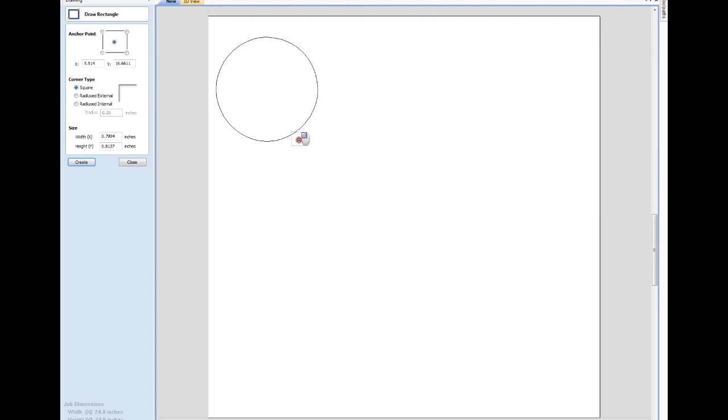If I wanted to create the design here, I could just click on Create a New File, specify the size of the material I want and the thickness, and then hit OK. And then use these simple drawing tools to create whatever shape I want. I could specify the location and size of this object. I can create different shape objects.

I can combine multiple objects by selecting them and using this Combine tool, and now they become one object. I also have this polygon type object to create whatever shape I want. And then I could specify how I want the Creation Station to cut those shapes.

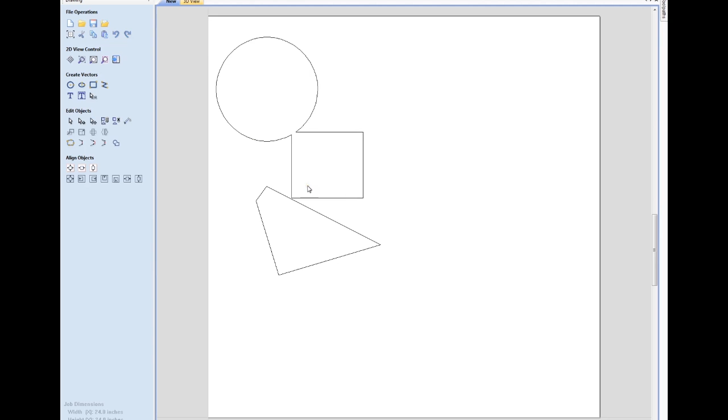But to save time for our purpose in this demonstration, I'm going to open up the design that I created in a simple drawing program. In this case, I created this design in Adobe Illustrator, but there's also a free open source software called Inkscape that allows you to do essentially the same thing.

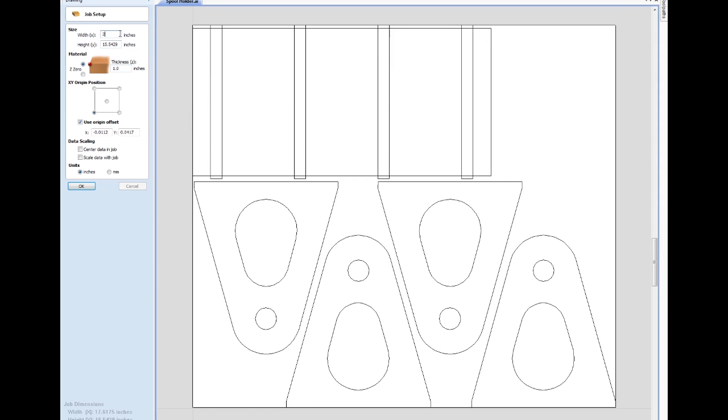So once you open the design, it automatically creates a workspace for you. I'm going to make the workspace just a little bit bigger to make it a little easier for us here, and tell it the thickness of the material I'm going to be using is 1/2 inch.

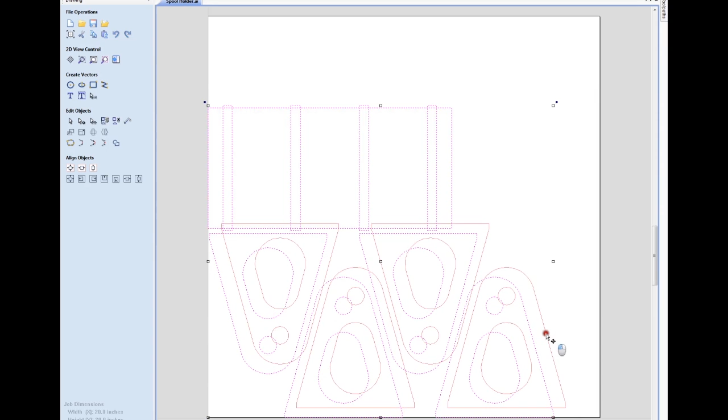So once I do that, there's my design, and I'm going to select all of these objects and just move them away from the edge a little bit here, just to make it a little easier for us to see the tool paths when I create them. But normally you would just leave them right up against the edge.

So the first thing I'm going to do is select the first things that I want to cut out. So I'm going to cut out these circles here for the piece of dowel rod that are going to hold the spindles in place. So I'm going to open up the Toolpaths tab and hit this little tack here, otherwise it'll keep automatically hiding this Toolpath tab. And I'm going to click this Create Profile Toolpath.

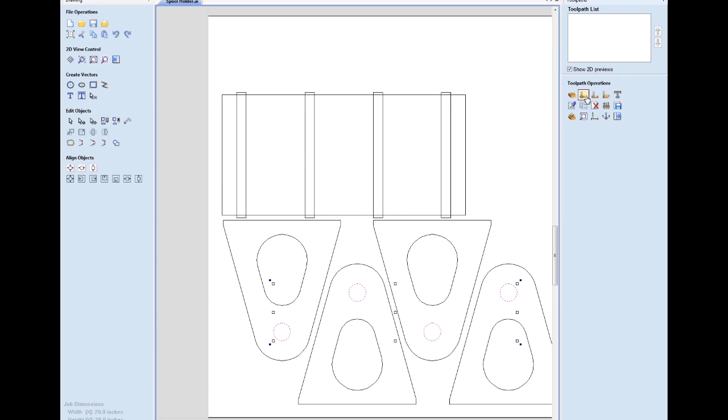And a profile toolpath follows the line of the shape. So you can specify either along the outside of the shape, along the inside of the shape, which is what we want in this case here, or directly along the path itself, right in the middle. So we want to go inside. We want to tell it our depth is going to be 1/2 inch. It's going to start cutting at 0 inches from the surface, or right at the surface.

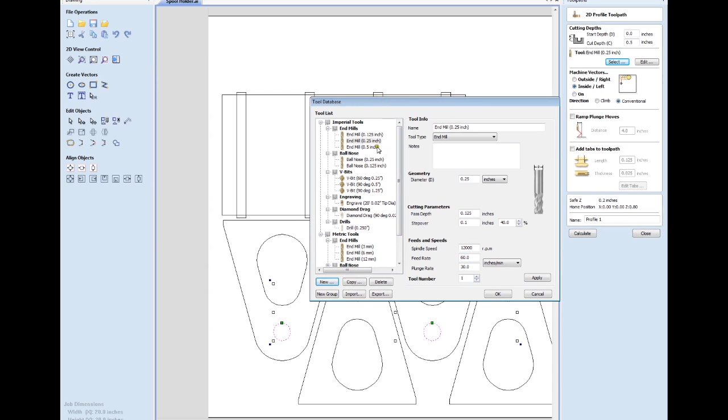And we can select the tool that we want to use right over here. So you have all these different options. I'm going to use the 1/4 inch end mill for all of our cuts in this project, and then hit calculate. And you'll see that the software automatically calculated how the tool path is going to move, what it's going to do, how it's going to cut out these shapes, and it previews that for you.

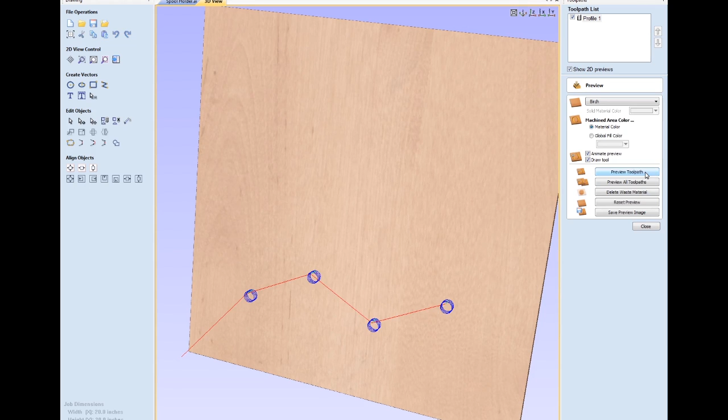If you hit the Preview button, it'll actually show you what it'll look like when that shape is actually cut out of the material. So you'll see you have this little tiny leftover tab, which is very small, and once it cuts through, the router bit will probably kick it out of the hole. But it's too small to worry about.

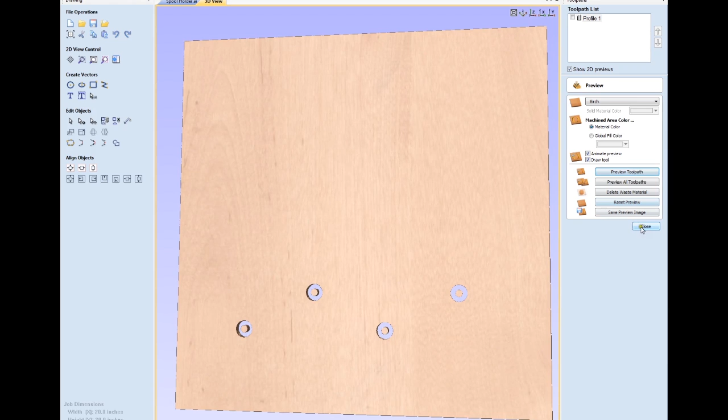The next shape, however, these larger pieces, we will have to worry about that piece coming out, and I'll show you that in a minute. But first, we need to cut that shape out. So again, we want to go along the inside. We want it to be 1/2 inch thick, and then we want to set these tabs. What these tabs do is they will hold the piece in place when the cutting is done.

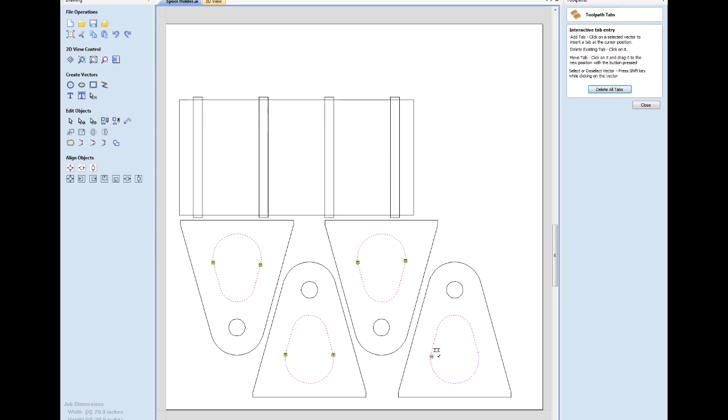So I'm going to hit Edit Tabs, and then this will allow me to insert the tabs where I want them. And once I get them all in there, we can see the preview, and it'll show us what these tabs actually will look like when the material is cut. So I'm going to hit Calculate. These are the cut paths that'll happen.

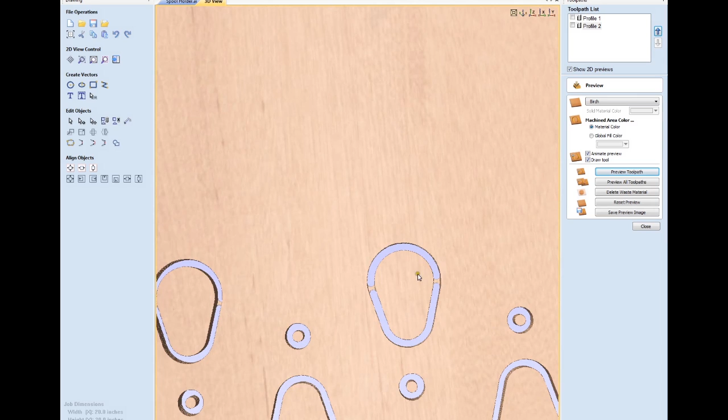If I hit Preview, it'll show us what it'll actually look like, and you can see the tabs there, which will hold the material in this piece in place so that it won't go flying across the room and potentially break something or hurt someone. Okay, so that's that piece.

Now we want to cut the actual trusses out themselves. So we're going to select those and hit Create Profile Toolpath again. This time we're going to want to go along the outside of the shape, not along the inside. And we're going to again keep the same tool and depth, and we're going to add tabs again to keep the thing from flying.

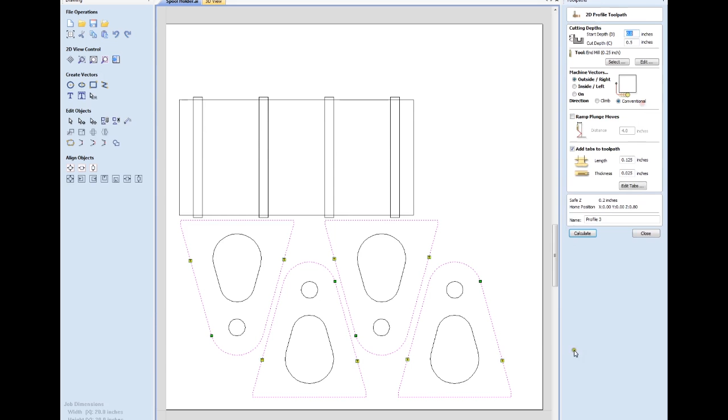And just right about here, 2 per shape, and calculate. And now we can preview that and see what it'll actually look like. And there you go. Those are the trusses. And once these are cut out, you could just use a razor blade and slice those off very easily. Maybe you give them a little sanding to smooth them out, and you will never know they were there.

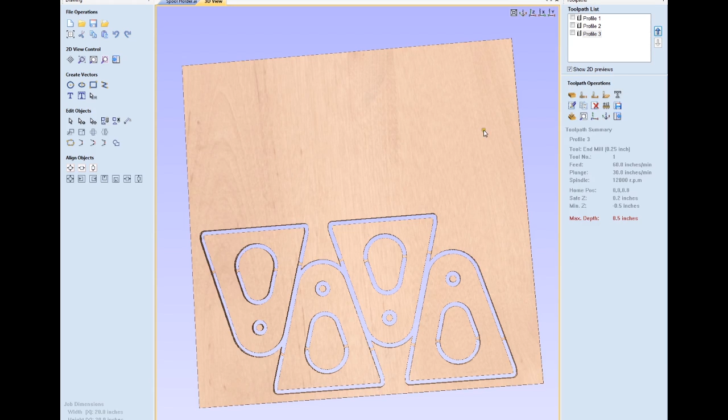Okay, so now we need to do the base. The base consists of one large piece with slots cut into it. Not all the way through. We will only want them deep enough for these trusses to slide into.

You'll notice that I made these rectangles a little wider than the base itself. The reason for that is if it stopped right at the edge here, the router bit has a radius, and you wouldn't get a nice smooth square here, and you'd have to cut that out with a razor blade, which is kind of a pain. So if you make the rectangles a little bit larger, the router bit comes out, and you'll get a nice smooth corner here.

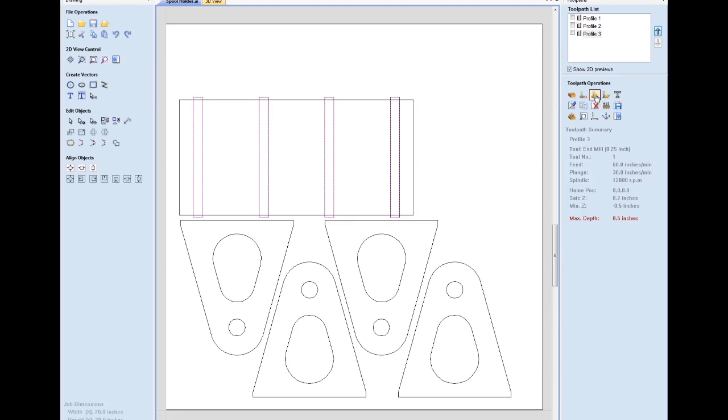So I'm going to select all 4 of these rectangles, and then I'm going to click Create Pocket Toolpath, not a profile, but a pocket. And we are going to specify a depth. I'm going to make it 0.2 inches, and a 1/4 inch tool again, same tool. And there's no need for tabs because we're not going all the way through the material. And we're going to hit Calculate and Preview, and we'll see what that actually looks like when it runs through.

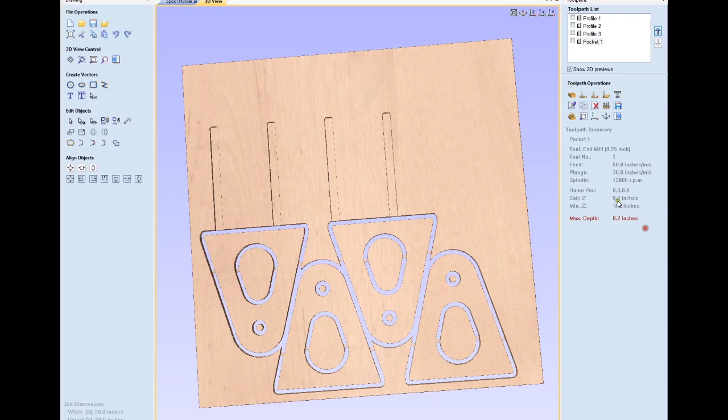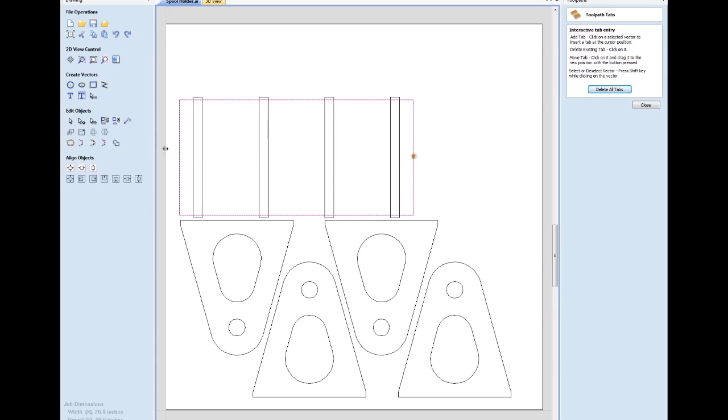Okay, we're trying to keep the pieces all nice and close together so we waste as little material as possible. So the last step is to cut the actual base out itself. So we're going to go to, again, a profile toolpath, cut along the outside all the way through, so 1/2 inch thick, and we're going to add a couple tabs again just to make sure this piece doesn't go flying once it gets loose. Okay, and calculate and preview, and that's what our final object is going to look like once we're done cutting it out.

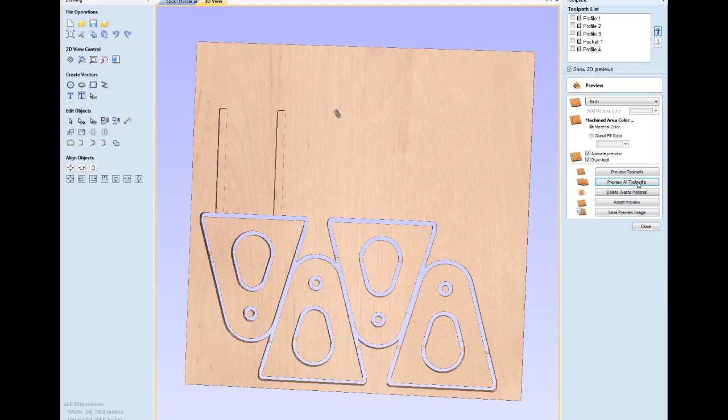So if we want to see the whole thing, we can hit Reset Preview and preview all toolpaths, and it'll run through the entire program to show you what the Creation Station will actually do for this project. So now that we're done with that, the last step is to actually save our toolpaths. So we're going to hit Save. We're going to select the toolpaths that we want to export, which in this case is all of them. We're going to select a post processor.

We're going to want the G-code arcs in inches post processor, and you'll notice there's a bunch of different post processors for different machines. Our machine, the Creation Station, just uses standard G-code, so there's no need for any special post processor. So we're going to hit Save Toolpaths, and we're going to call it spindle holder,

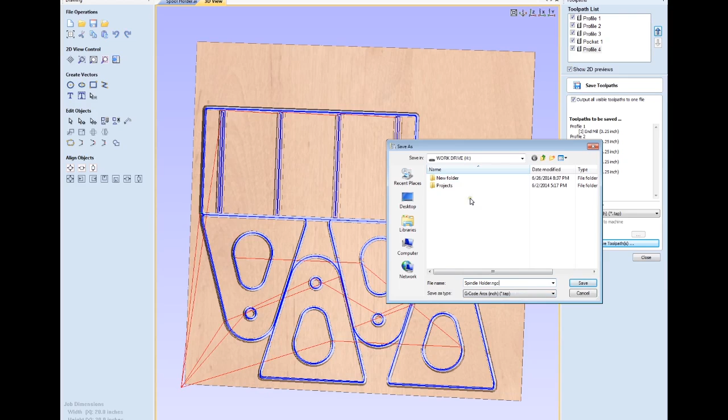and I'm going to add the extension NGC because that's the type of extension that the Creation Station uses, not the .tap, which is the default. That's just a simple modification that you have to do in order for this to work. So I'm going to hit save, and it's going to save that to a thumb drive that I have plugged into my machine here. And then I'm going to remove that thumb drive and take it to the Creation Station, the machine controller machine.

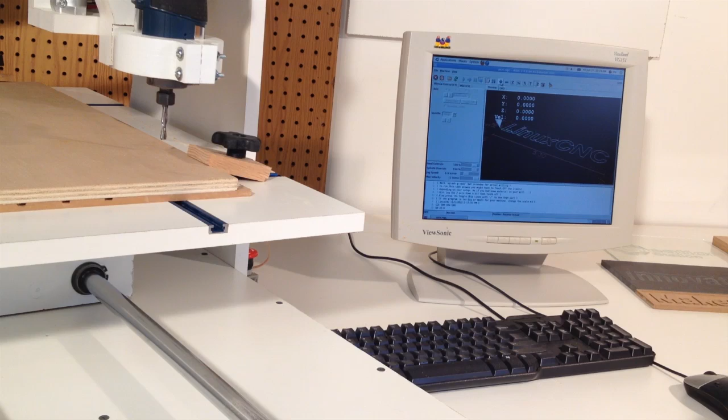Okay, for the next step, we're going to load up our G-code file that we created in Cut2D on our machine controller machine. Now, before I do that, let's talk about the machine controller. The machine controller is a computer that directly drives the Creation Station. Now, we have it as a separate machine here, but you could use your existing machine, whether it be a desktop or a laptop, to control the Creation Station.

We also recommend the Linux CNC software. It's free, it's open source, it's powerful, it's easy to use and install. But there are also Windows alternatives that are commercial that you have to purchase. Linux CNC, though, is very low requirements for the computer. The minimum requirements are a 733 megahertz computer with 256 megabytes of RAM minimum. So those are specifications that you could probably dig up an old computer that has those specifications, or even better.

The monitor, we have an LCD here, but people are trying to get rid of those old CRTs. An old CRT would be perfect here. An old computer also is great here because if you're cutting metal on the Creation Station, and you've got metal chips flying around, you don't want your fancy, expensive laptop or desktop to have metal pieces in it. Whereas if you've got it for free, it really doesn't matter so much. And it's always good to recycle. So let's move on and load up the G-code file that we created.

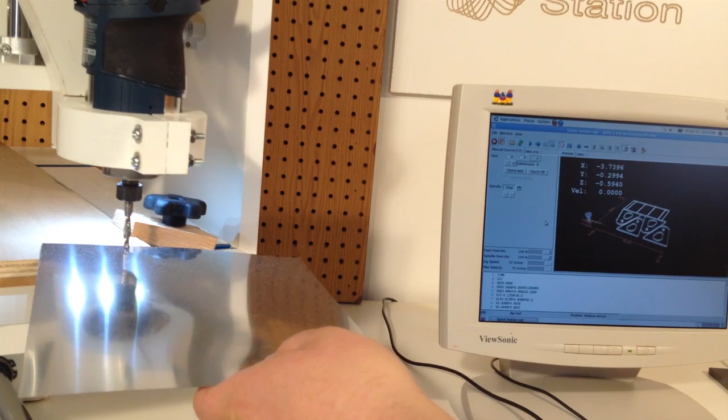Now, one of our stretch goals is a sheet of material, like, for example, this sheet of stainless steel here, that you can put right under the bit till you feel it give some resistance. And this sheet of stainless steel is 5/1000ths of an inch. So I can then specify to move the head only in steps of 5/1000ths, and then hit the minus button once, and now it should be touching the top of the plywood exactly. I'm going on to each of these axes, hitting home, and specifying that's the home position for our router bit.

I'm also going to press the touch off button, which will tell the computer that I've touched the tip of the router bit to the material on the Z-axis. You'll notice it changes the display a little bit to reconfigure the height of all these cuts to match. So the next step is to actually run our G-code. So I'm going to hit the play button here on the computer, and I'll get a message saying please insert tool number 1 and press continue when ready. As soon as I press continue, the execution will start. Okay, so I'm going to hit the continue button now.

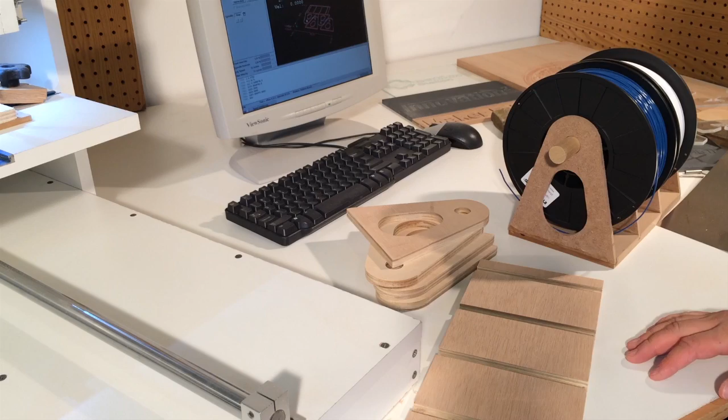Okay, now we've got all the pieces sanded. All we have to do is take our trusses and insert them into these slots, probably with a little wood glue, but I'm going to leave the wood glue out for now. And they fit nice and snug, which is good. And there we go. Just add a little bit of wood glue, maybe tap them down a little bit with a hammer, and then cut a piece of dowel rod for the spools, and you're all set.